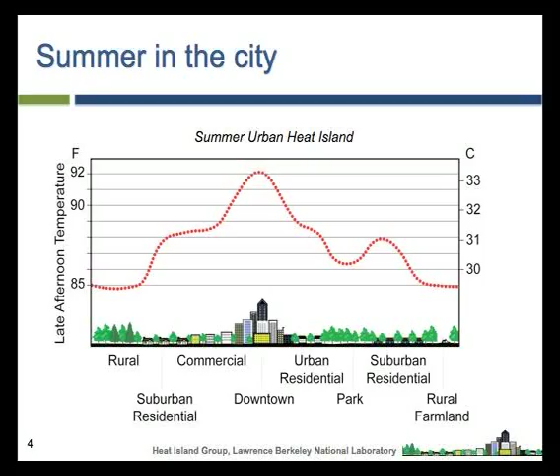So that effect, namely that the temperature here is very different in the suburbs or the rural areas. And as you get toward the center, the temperature, shown here in Fahrenheit, tends to be anywhere from, say, 5 to 7 degrees Fahrenheit higher in the center of the city than it is where the trees are still there.

We simply replace trees, which are cool, the forests are pleasant and cool, with man-made surfaces, which tend to be dark and tend to be hot. In addition, there's a lot more people concentrated in the center of the city. That's another effect, but that we can't do much about. I mean, people want to live in the center and work in the center of cities.

But there is something we can do about the kind of surfaces we put in the city. And that's going to be the gist of this talk. What can we do to relieve this excess heating in the center of cities, or where the cities are built up? This has not only an effect of discomfort, there's a real economic problem here too.

What is shown here is the electric power demand in Sacramento. We got this data from SMUD, the Sacramento Municipal Utility District. On a day in July 1999, this was one of their peak days. We picked it not to be typical, but it's a hot day. It went up to about 107 degrees that day.

And what we show here is their demand starting at, say, 1 a.m. in the morning, 2, 3, 4, 5. The temperature was going down. At about 6 a.m., the sun starts to rise. People wake up. They start turning on electricity, their air conditioners. And as the day goes on, it gets hotter and hotter, and the demand for electricity gets higher and higher until at noon, it's up around 2,500 megawatts.

And then by 6 p.m., it's up here around 2,700, peaks out, and sort of lingers there as the day cools down. And finally, it cools down, and people go to sleep and turn off their air conditioners a little bit.

What this means is that these are indicating the number of power plants you would need to generate this electricity, each power plant being a typical one, named after Art Rosenfeld, the Rosenfeld effect, a 500 megawatt power plant. So to get this much power, you need at least 5 power plants. Close to 6, actually, because 5 will produce you 2,500. So 5.5 power plants.

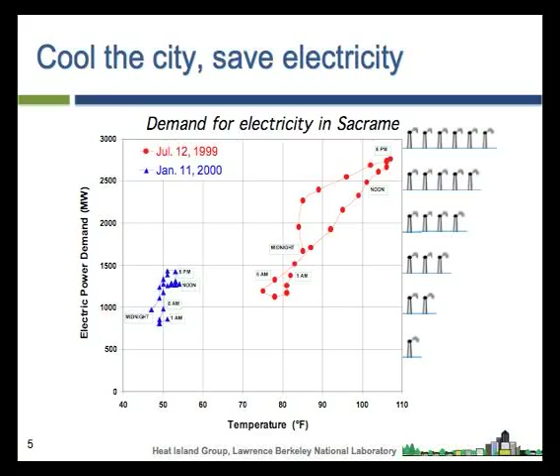But you see, the actual power that's being used on a January day is a lot less, half as much. So that means that the power company has to have in reserve all these power plants, which means that there's a capital expense to have power plants that you built, but you're not using much of the year. So that's a drag.

And then, moreover, these power plants that they finally turn on are usually the least efficient, most polluting power plants, because you use your most efficient ones first. So as you turn on your old plants, you create more pollution, and you're using more energy, and it's an unfortunate situation.

Now, the heat island effect is actually relatively small. Where's my arrow gone? Where has my arrow gone?

All right, but the heat island effect is typically a few degrees. So what can we do? Well, we can possibly slide down this curve a degree or two. That heat island effect was about 5 to 7 degrees. If we can even slide down a few degrees, we can cut off the top of this curve and save much power. The other thing we do is cut down on pollution.

And another effect is the fact that when things get very hot, there are actually deaths caused by this excess heating. The one case that we have some pretty good data on is in Chicago in 1995. There were 739 or so deaths attributed to the heat wave that they had.

And interestingly, almost all of them, like 700 of those deaths, occurred in the top floor of black-roofed buildings that didn't have air conditioning. So those roofs were very, very hot in the sun. If they had thought to whiten the roof, they could have perhaps saved those people's lives. So there's a health issue here also.

And so the question is now, what can we do about it? So the basic physics question that some of us are interested in is, how is the air heated in the first place? And it's interesting that the sunlight coming in from the sun does not heat the air directly.

I could give you a quick proof of that. When you came into this building, you could look out and see the Golden Gate Bridge. The Golden Gate Bridge is 9 miles from here as the crow flies. So that means that sunlight has come from the sun. When you look in daylight, sunlight has come from the sun, it hits the bridge, it comes to your eye through 9 miles of air.

That's twice the thickness of our atmosphere. And yet you can see the bridge very clearly on a clear day. So that's kind of an indication that sunlight travels very well through the atmosphere. And in fact, we'll show real data later about that. So how is the air heated?

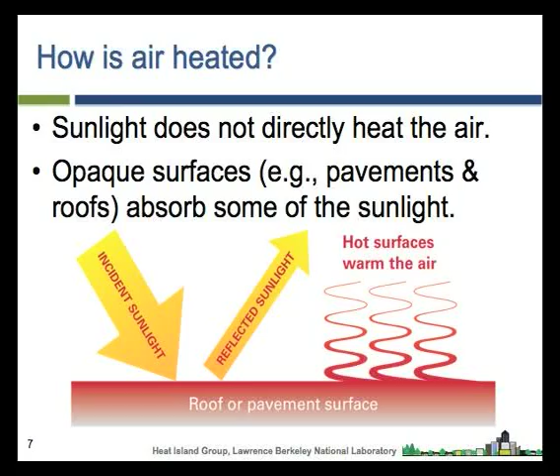Well, the way it's heated is the fact that there are opaque surfaces, surfaces that cast a shadow. So the light comes in from the sun, it strikes the surface. Now this is a light-colored surface. Most of the light is coming back. But some of it stays in the surface, and that which stays in the surface heats the surface. And then the air comes along and touches that warm surface, the hot surface, and the air gets warm from that.

So this is the clue of how we can attack the problem, because the surface is acting as kind of a converter of sunlight into heat of the air. So if we can get a handle on the surface, we can get a handle on how hot the air gets. The other feature is that not only does the roof or pavement get hot, which is actually bad for the roof and the pavement, because it causes them to deteriorate faster.

Moreover, if you have a building underneath the roof, that heat that's been absorbed by the roof travels into the building, and then you have to turn on your air conditioner in some places. Berkeley is an exception. We're lucky. We have the nice, cool atmosphere too. But you go to Sacramento, and it would be impossible to live there if you didn't have air conditioning. So the point is that it's very much advantageous.

Also, pavements suffer if it gets too hot. One of the things that designers of pavements worry about is how hot that pavement is going to get. And if it gets very hot, they have to make a better pavement to handle the heat and the deterioration that the heat causes. So there's an extra expense, which we can avoid if we can possibly make the pavement cooler. So one way of characterizing this is to study what's called the solar reflectance.

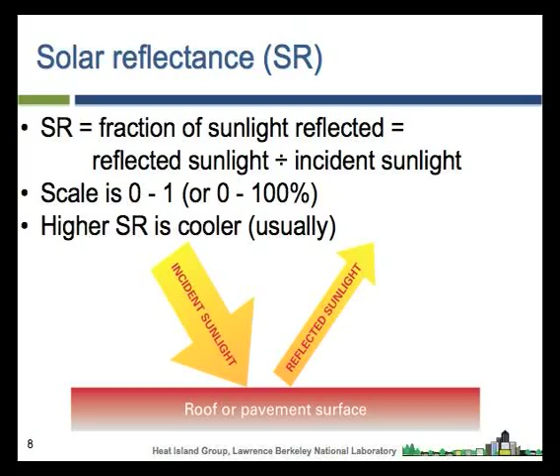What is the ratio of the light that's reflected compared to the light that's come in? On a scale of 0 to 1, 0 would mean zero reflectance, everything is absorbed, it's black. If you have no light coming out, it's black. On the other hand, if all the light came out, it would be very white. This is the light that comes in, comes out. That's 100% solar reflectance. And clearly, if the light is reflected and not caught in the material, it's cooler. So what we're looking for is materials of higher solar reflectance.

And indeed, that theory is borne out. We've done experiments, others have too, of the temperature rise. That is, how much hotter the surface is than the air around it. And if the reflectance is very high, like 100%, like a white surface, it rises a little bit, 5 degrees centigrade, which is about 9 degrees Fahrenheit.

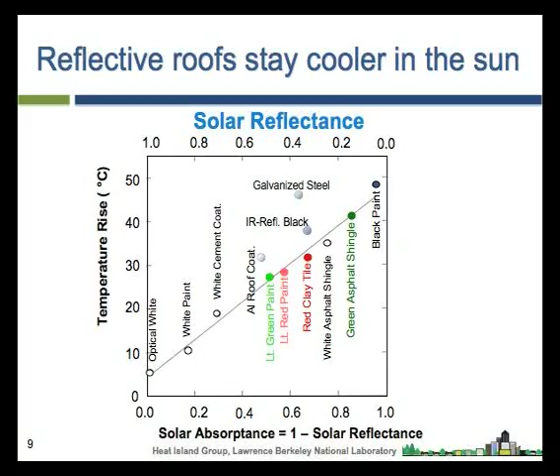Also if you decrease the solar reflectance down to about 0, in other words, it's very black, it's hardly reflecting at all, like black paint, the temperature can rise 50 degrees, which is something like 80 or 90 Fahrenheit above the ambient air. That's your cat on a hot tin roof, really. I mean, you don't want that.

So our goal is to try to urge people to use lighter colored materials or find new light colored materials that will make these lower temperatures. And that's the gist of our talk. There's another feature, and that is that once the surface is warm, like the Earth gets warmed by the sun, it also radiates, but it radiates at a different place.

I'm fond of telling my male students, tell your girlfriend that she glows. It's true, physically she glows in the infrared, I'm afraid. So you won't see her in the dark, but she does radiate. And she radiates at a wavelength around in here, whereas the sun is radiating 20 times higher in frequency, or at wavelengths shorter by a factor of 20. Now here's what I said before, and that is that the sunlight passes through. This is the absorption by the atmosphere.

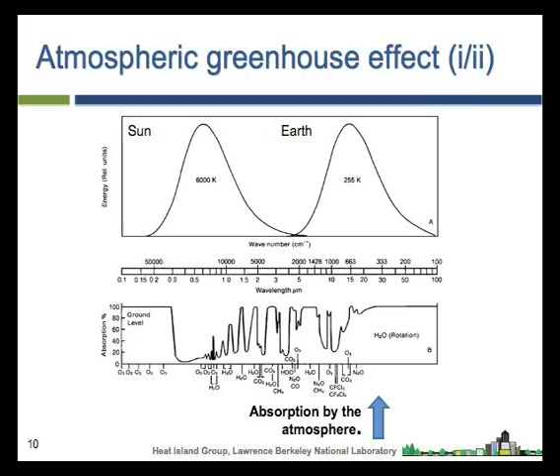Absorption is extremely low, which is one of the reasons our planet is so great. Our atmosphere allows sunlight to pass through, but once it gets converted to thermal radiation, gases in the air like carbon dioxide, oxygen, and water absorb this thermal infrared light, acting like a blanket. This is the atmospheric greenhouse effect, where light coming out of the Earth and us is blocked by gases in the atmosphere.

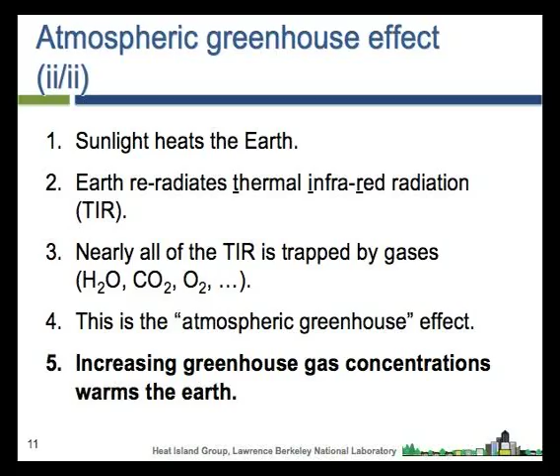If you put in too much of these gases, like carbon dioxide, we increase the absorption and can heat the Earth. That's the global warming problem. The gist is that if we can prevent light from sticking in surfaces, we'll reduce the thermal radiation that's trapped, reduce the greenhouse effect, and keep the planet a bit cooler. Art Rosenfeld will talk in great detail about that.

So here is our task: what can we make cooler? There are many dark surfaces in a typical city. Here is a patch of Sacramento, where we measured what's going on. Some dark surfaces: about 39% of the surface as seen from the sky is pavement, and about 19-20% is roofs, usually dark. Vegetation is good, and Sacramento has a program for more vegetation. But our job is how do we make roofs and pavements cooler, namely more reflective of light. This is the introduction to the rest of the talk.

Dr. Levinson will talk about how cooler roofs directly prevent heat from getting into a building, reducing the air conditioning needed, which reduces demand at the power plant, meaning less energy consumed, less carbon dioxide generated, and fewer of those nasty compounds that turn into ozone, which is bad for your health. Ronnen will talk about that.

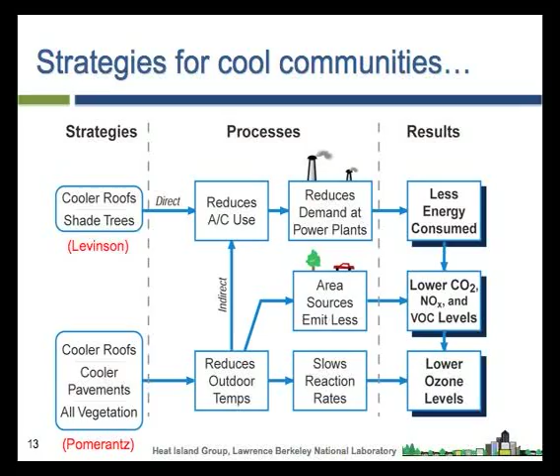I'll mention the other side of it, namely heating the outdoor air. Pavements and roofs also heat the outside air. If we can make them cooler, we reduce outside air temperature ever so slightly, a few degrees, but it can matter, reducing demand inside the house because the outside is cooler. Again, we go through the cycle of reducing electricity demand, energy consumed, and pollutants.

The other thing that happens if outside air is cooler is that area sources like trees emit fewer organic compounds—the part of the tree that you smell can actually become part of pollution, converted into ozone. Also, if you reduce outside air temperature, the reactions producing these bad chemicals slow down, so you can actually get less ozone.

This is the outline of the talk. As I mentioned, Art Rosenfeld will talk about how if you reflect more sunlight, it's as though you took away some of that blanket, because the planet will get cooler—the sunlight will travel right out.

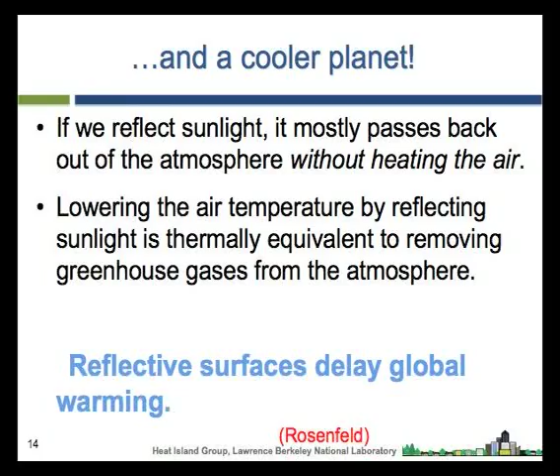You know that because you can go to Google, ask for satellite view, and see your own house—meaning sunlight hit your house and went back up to a satellite, passing through the atmosphere. So if you leave it as sunlight, it gets out very well, and that's what we're trying to do. The other way to cool the air is to take the greenhouse gases out—one offset is equivalent to the other for heating the planet. Art will give us his ideas on that.

So with that, I turn it over to Dr. Levinson. I'm going to take you on a little cool roof safari—in other words, what would you see? What might you see?

Here in North America, we certainly have cool roofs, usually white roofs. You might find them on a commercial building because those roofs usually can't be seen from the street. A white roof on a commercial building is terrific—when new, it could reflect about 80% of the sunlight that strikes it, and it will really help keep that building's use of air conditioning down, or if it's not air conditioned, make it more comfortable on the top floor.

In some other parts of the world, you might see white surfaces on pitched roofs. It's not really a North American aesthetic outside of places like Florida, but this is a picture from Bermuda, where they have a history of white roofs everywhere. Another possibility you might see here in North America is the cool colored roof. Some roofing materials happen to be naturally reflective to sunlight, and others are reflective because you've engineered them that way.

That's mostly because when you have a pitched roof, it's easier to put insulation into your roofing assembly, so less heat tends to flow into the building. If you have a cool colored roof, like this lovely red clay tile roof shown here, your savings are about half as good as a white roof, because the cool colored roof is about half as reflective as the white roof.

Now, we've asked the question: what would happen if you were to implement a broad program of cool roofs on buildings in the US? I'm going to talk about what would happen if you put white roofs on 80% of the commercial buildings we have. Why 80%? Well, some of them are already white, so we're being a little conservative there.

The idea is your typical commercial building might have a gray roof that reflects about 20% of sunlight. You could put on a white roof that, when new and bright, would reflect about 80% of sunlight. But after it gets soiled, it might reflect only 55% or 60%. We assume from day one that it got soiled, because we like our numbers to stand up.

What we found is if you take that 2.1 billion square meters—multiply by 10 to get square feet—of roof, representing 80% of the roofs on commercial buildings in the US, each year you'd save over $700 million on utility bills, and reduce carbon emissions from power plants enough to equal taking over 1 million cars off the road.

Or in terms of nitrogen oxide, which is a precursor to ozone and smog that Mel was talking about, that's the equivalent of taking over 500,000 cars off the road. Plus there are savings from things like sulfur dioxide and mercury, but those I can't equate to cars, so I focus on the first two.

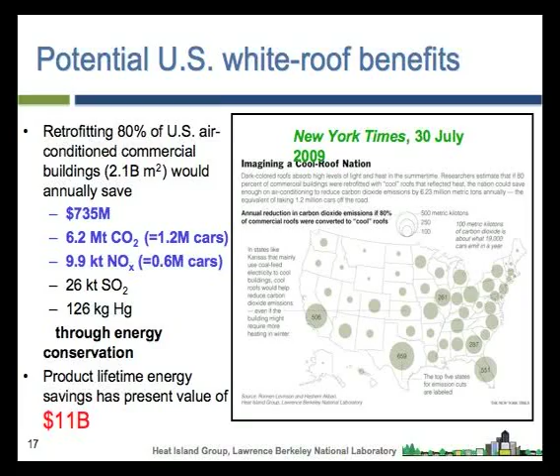Over the lifetime of a roof—typically around 20 years—the energy savings attained would have a present value, meaning what it's worth right now today, since energy savings in the future aren't worth quite as much as savings incurred in the first year. Nationally, that gives you $11 billion worth of savings.

For the US economy, $11 billion maybe isn't a lot, until you realize that for commercial buildings, where your choice might be a gray, black, or white roof, there's no extra cost in choosing white when it's time to replace the roof for ordinary maintenance. A typical roof lasts about 20 years, meaning each year you're replacing about 5% of the US roofing stock. So this is free money, and we all like free money.

But white roofs aren't going to work for every building, because we just don't accept white roofs on those you can see from the street—except in Florida, where they do, and we'll show you some photos later. So I'm going to talk a bit about what we can do for those roofs that will be seen from the street.

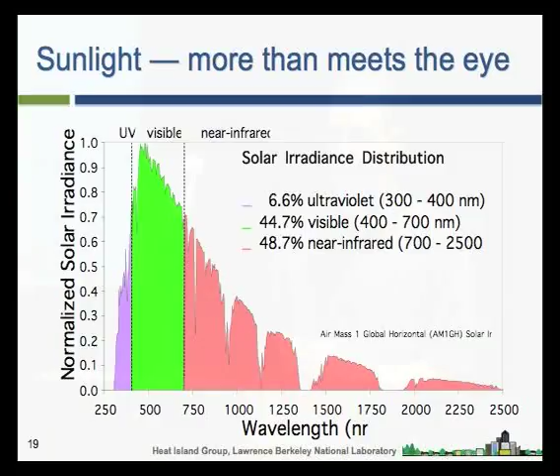So it doesn't matter how much near infrared light a surface reflects, that does not change the appearance. So what you could cleverly do is have the surface reflect in the visible part of the solar spectrum the way that's needed to make it look the way you want. But maybe we could also do a good job of reflecting these invisible patches of light out here in the ultraviolet and the near infrared. Well, it turns out it's very hard to make a surface reflect in the ultraviolet unless it's a bare, shiny metal. Most surfaces don't, so we kind of write that off, and focus instead on this nearly half of sunlight that is at wavelengths longer than what the eye can see, trying to make surfaces reflect as much as possible in that part of the spectrum.

Here's a little graph that tries to put some data to that idea. If I have a white roof here, a brand spanking new white roof on some sort of a box store, and I were to measure its reflectance as a function of wavelength over the solar spectrum, this yellow curve here is that solar spectrum I showed in the last slide. Well, we see that in the visible, it's very reflective, and of course that's what your eye is telling you, and it looks bright white.

Also, though, at these longer wavelengths, it is still pretty reflective. I mean, you don't know that a priori, but you can measure it, and if you were to touch it, you would feel, hey, this is pretty cool. In fact, a bright white surface reflects over 80% of sunlight, like this white roof here.

Now, at the other end, of course, you could have a black surface that reflects almost nothing, but I'm being a little more realistic because there aren't that many black roofs. They tend to be a little more gray. Here's a gray roof, and this is reflecting about 25% of the sunlight in the visible, and then that reflectance falls down to around 15% as you get towards the longest wavelengths in sunlight. And if you were to take an average, you'd find that weighted with the solar spectrum, it's reflecting a little less than 25% of the sunlight.

So this brand new white roof is over 80%, this dark gray roof less than a quarter. Well, in the middle, you can have something like this cool red roof, which I showed in a previous slide. It's not reflecting as strongly in the visible, otherwise it would look white. In fact, it's got this very interesting shape to it, which translates to red in the visible spectrum. But in the near infrared, which doesn't affect color, boy, it's pretty darn reflective. So the result is this cool color, in this case a cool red clay tile, is reflecting about 40% of sunlight. So in a way, it's pretty much in the middle between the case of the dark roof and the bright white roof.

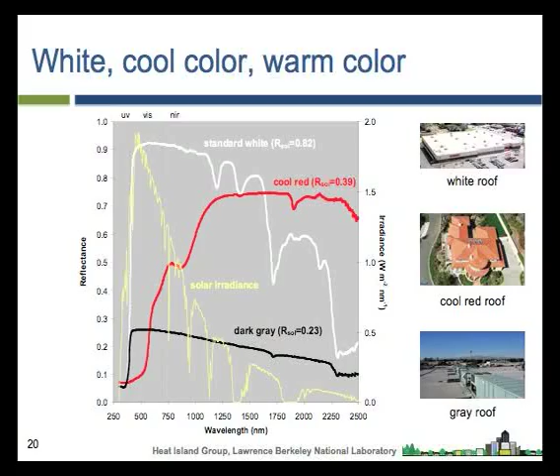And frankly, if your neighbors are going to lynch you for putting a white roof on your building, it's not a bad choice. Better than dying, I always say.

So let me tell you about some of the cool colored roofs that you might see in Home Depot or from your building contractor, or just by looking around, because there are cool roofs on existing buildings right now. You can get cool concrete tiles, and concrete tile in California, because we have this Spanish style of architecture, is pretty popular. You can get cool clay tile. You can get cool metal, which is not as commonly used on homes, but if you were to look at the roof on, say, fast food restaurants, that's a pretty common choice. And you can also get cool-ish fiberglass shingles, or asphalt shingles, really.

I'm going to talk about each, but I thought maybe we should bring up some props and do a little bit of show and tell. So Pablo, our graduate student, is going to come up here and show you a few things.

So while he's bringing things up, I'm going to make an interesting point.

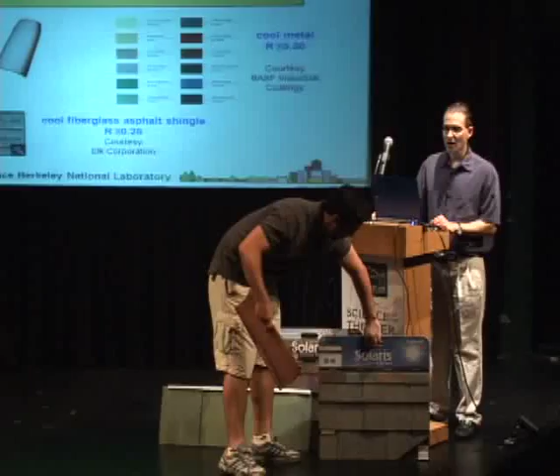In this top image here, I have color-matched versions of standard concrete tiles and what we call cool concrete tiles. They've been designed to look exactly the same. But let's look at this extreme case of a black tile.

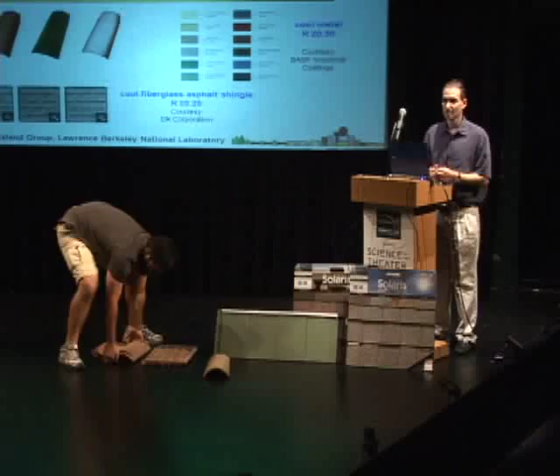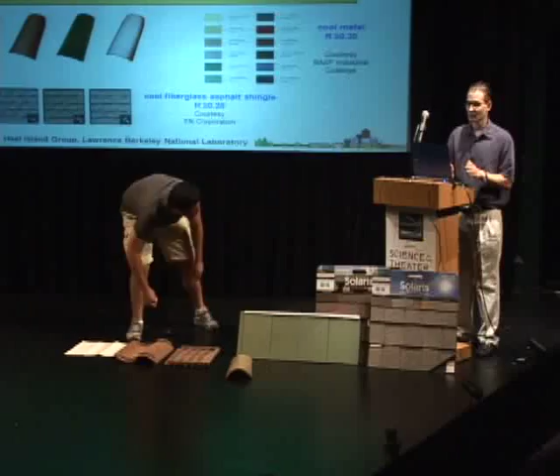A typical black surface made with ordinary black pigments, like carbon black or iron oxide black—if you see anything that's black, it's probably one of those two—reflects maybe 4% of sunlight. Almost nothing reflects 0% unless it's a black body cavity. Ordinary black surfaces bottom out around 4% reflectance.

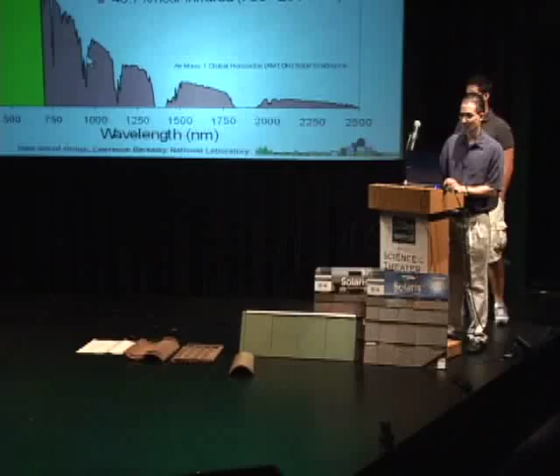If we go instead for a cool color, in which we try to maximize reflectance in the near infrared spectrum, we can do a lot better. In fact, we can make it reflect over 40% of sunlight—a boost of 37 points in reflectance. The darker the color is to begin with, the more improvement you can attain with a cool color.

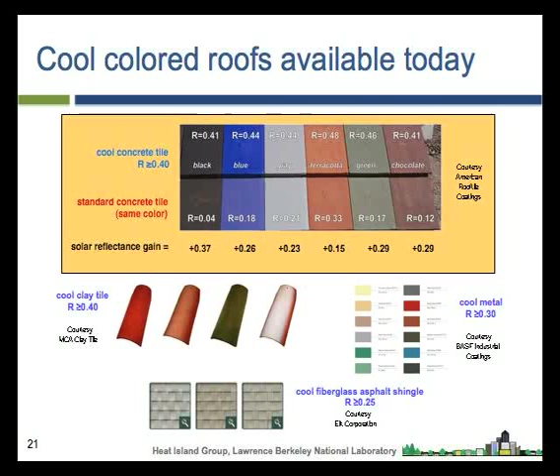And now we're going to have Pablo do a little bit of show and tell. Why don't you talk about what we've got here?

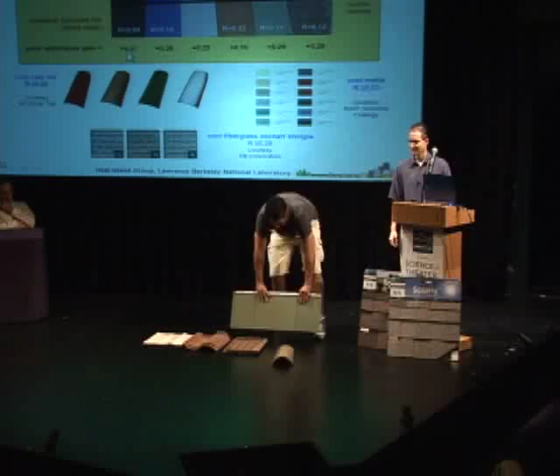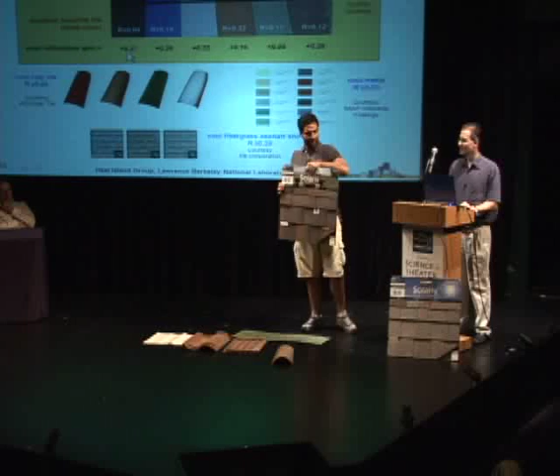These two right here are the asphalt shingles. Go ahead and hold them up. These have a solar reflectance of 26 and a thermal emittance of 91—we'll skip the emittance. That 26 is 26 points, or 26%, a little over a quarter of the sunlight, and it's the same solar reflectance as these other asphalt shingles right here.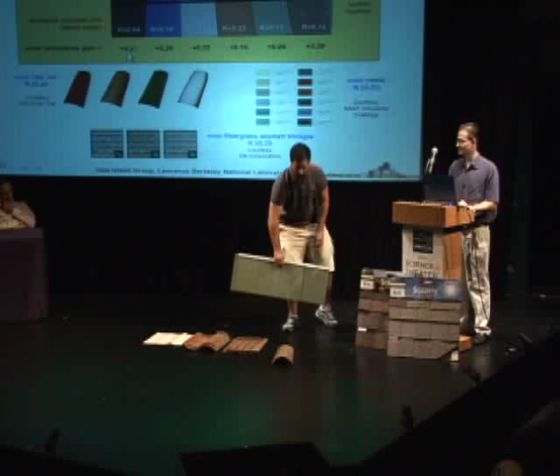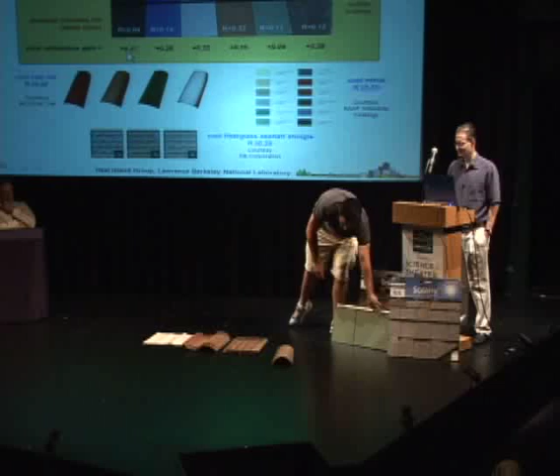Then we go to a metal, this green metal, with a solar reflectance of 41, which is higher than asphalt shingles. Then we go to the clay tile, which has the higher one, a solar reflectance of 52.

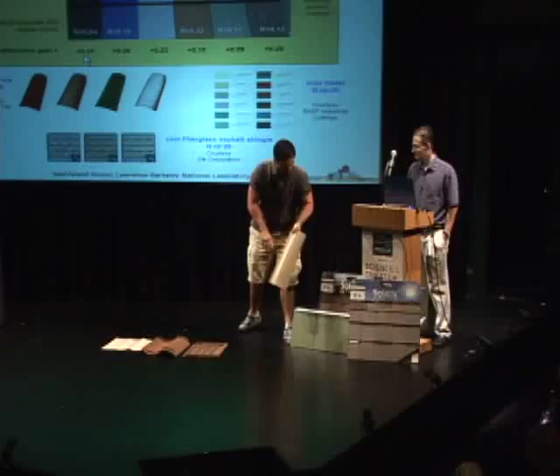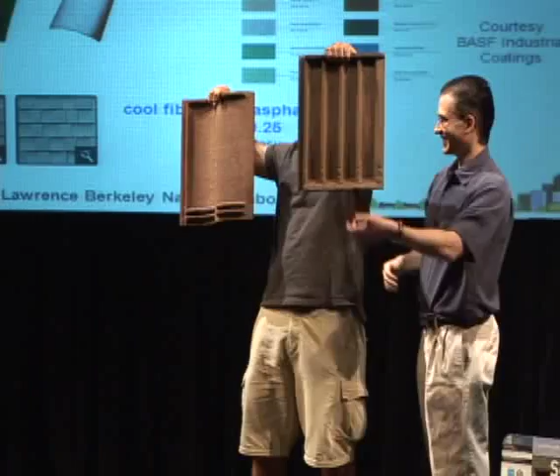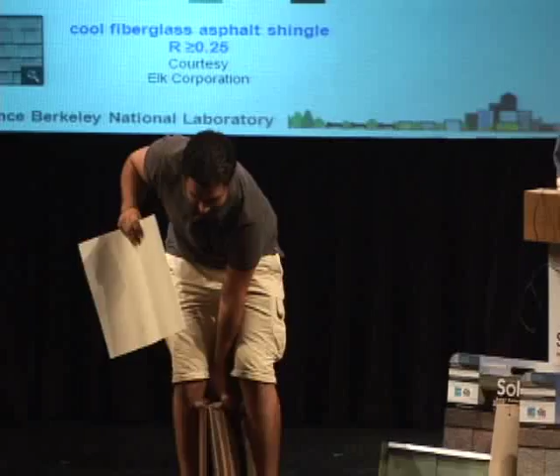These two right here are concrete tiles. They're heavy, and the solar reflectance is 0.17 and 0.20—17% and 20%. And the best one, this white one right here, is a roofing membrane, with a solar reflectance of 88.

That's what we all need to have. Excellent—you see, we work on hiring strong graduate students. So go ahead, you can take them down.

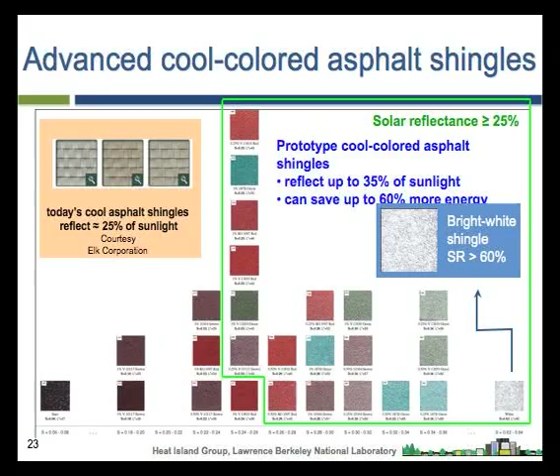A lot of these will reflect at least 25%, or up to 35% of sunlight. And if you're willing to go with a bright white shingle, because maybe that's fine with you, then this one down here in the corner, which I'm showing enlarged here, reflects 62% of sunlight, so well over 60%. That's pretty good. Now, these are still in development in the laboratory, but we've been working with roofing manufacturers, and we hope over the next few years to bring that to market.

The other really important area in which cool roofs can get better is we can try to keep them clean without active maintenance. I've got a picture here of two side-by-side roofs in Florida that have been outside for 9 years. The upper one is a white painted metal, a fluorinated polymer, a lot like Teflon in its dirt resistance characteristics. The lower one is an elastomeric coating over a plastic membrane, and this began as a bright white roof, but after several years, it's gotten grayish.

If you were to go look at exposed white roofs, you'd see this is pretty common. The initial reflectance might have been 80%, but after a couple years, could be 55% in this particular example. What if we could redesign this really common kind of white roof to stay as clean as this less common metal roof? Metal roofing is somewhat more expensive than plastic roofing, so it's just not quite as common.

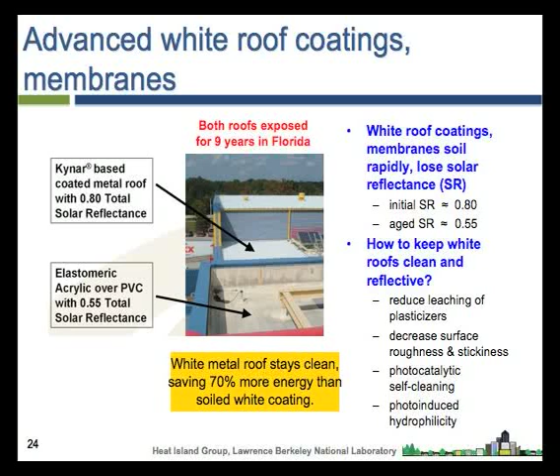Now, the bottom line is that if we were to go to these cool colored shingles, we could improve the energy savings that we get from cool shingles by 60%. And if we could go to cleaner white roofs, we could increase the energy savings from a cool white roof by 70%. And that's nothing to sneeze at. So that was my little tour of cool roofing. And now I'm going to turn this back over to Mel, who's going to talk about cool pavements.

I just will say a few words about some efforts to make pavements cooler, because they are a significant fraction of the city. It's surprising how much. I think I showed before that it might be as much as 35 to 40%. It depends on the city, but that's about right.

Because pavements include, of course, not only your streets, and you have also parking lots and driveways and sidewalks and so on, as we'll see. But the first thing you have to understand about trying to change the reflectivity of pavements is that they are a composite material. What you really have here is what we call aggregate. Namely, it's rocks of various sizes, a gradation of rocks, such that when you piece them all together, they can form the shape that you want, go around curves and so on, and have a nice, correct shape.

So you start out with this array of rocks, and then you have to hold them together. Otherwise, you have a gravel road, which is not particularly satisfactory for our high-speed travel. So we have to glue the rocks together, rocks and sand and stuff, and make a nice, firm, hard surface. So in order to do that, you coat each grain of rock or each piece of rock with a binder of some sort. Now, in the case of so-called asphalt concrete, what it's saying is that the binder is asphalt, which is a petroleum product.

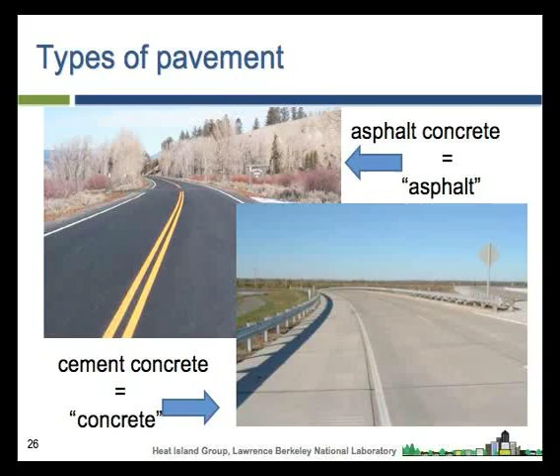It's this black, sticky material, which when it hardens is a very powerful glue and holds the rocks together, and you make an asphalt concrete, asphalt being the binder. We typically call that asphalt, but it really is a concrete, meaning that it's this composite. On the other hand, we have the possibility of gluing the rocks together with cement, a mineral. It's a mineral product, not a petroleum product. And that cement, those kinds of roads we call concrete. I don't know why they pick concrete for the cement concrete and asphalt for the asphalt concrete, but that's the way we speak of it.

So I may kick back and forth between calling it an asphalt road or a concrete road, but they're both composites. But the key thing is that because you're coating each grain, or you're trying to, in order to glue it together, what you see mostly is the color of the binder. So, for example, in the asphalt road, you're seeing the color of the black tar or asphalt. In the cement concrete, you're seeing the color of the cement that you use, which typically is much lighter colored. It's a mineral sort of like limestone or something like that. So it can be much lighter in color. That's the key thing. So again, our target is the binder, if possible, because that's what shows at first.

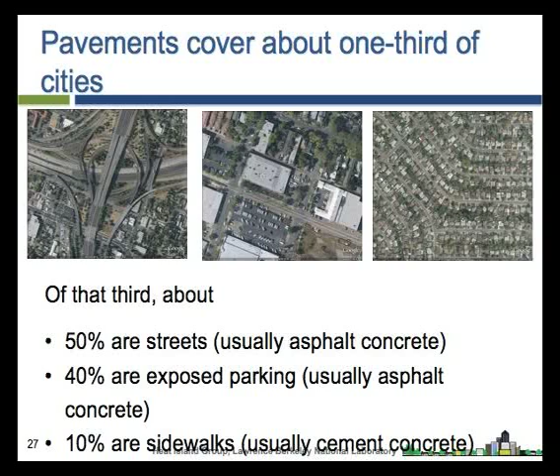Now, of that third of the city that is covered with pavements of various kinds, about 50% are streets that we ride on. There is exposed parking, that is not in garages and stuff like that. This would include your own driveways, parking lots, malls, what have you. Quite a bit of parking area, 40% of that third. And 10% are sidewalks, which are typically cement concrete. But these other roads, typically, as you know, are asphalt roads, asphalt concrete, which are dark. So because these constitute about 90% of our exposed pavement, our real target is to try to make the asphalt concrete lighter colored if we can. And we can also take a crack at the cement concrete, but it's simply a smaller target.

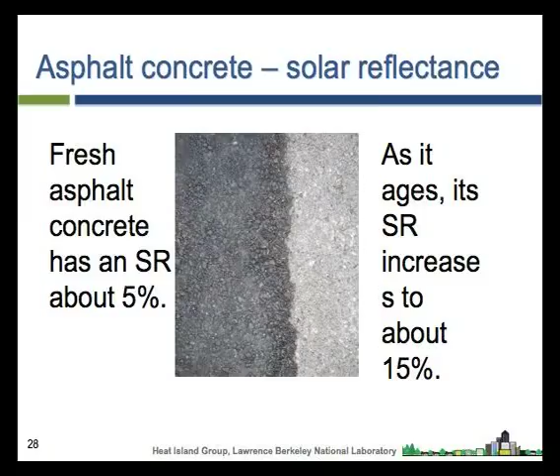So what are we starting with? We start with fresh asphalt concrete, as Ronnen mentioned, a typical black surface. And what's scary is that when people put on a new driveway, they want to make it blacker than black, so they even put carbon in there: see my nice black driveway? So the reflectance is only about 5%. 95% of the sunlight is absorbed in this fresh asphalt concrete. But as it ages, as Ronnen mentioned, ultraviolet light will break down some of the darkness, change its color. Also, dirt falls on it, and various drippings from your car or what have you. And typically its solar reflectance goes up to about 15%. So that's what we start with.

Now, the question is, can we do any better? With a new asphalt pavement, well, you got a problem because you try very hard to coat every grain with the asphalt, so it starts out black. But on the other hand, if you do put in a light-colored aggregate, as the binder wears off, as it will, because it's kind of soft stuff, eventually the light-colored aggregate will show through. And as you know, these roads gray out, as I showed you before. So it's partly due to the exposing of the light-colored rock. Or in some places, like near the seashore, they can use seashells.

Say that 10 times fast.

These white seashells can actually be put in as part of your aggregate. Or porcelain. I mean, you can break up toilet commodes into small pieces and put them into your roads, and they do. So these white aggregates can be useful in making lighter colored new pavements. On the other hand, for an old pavement, which would require maintenance and resurfacing periodically, roughly every 10 years, it's possible to do something.

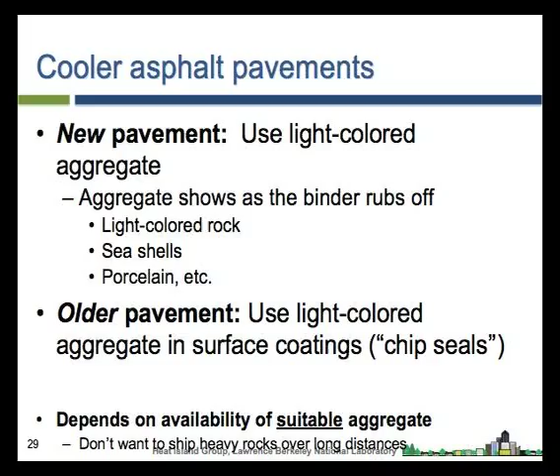Now the big issue with roads is that this aggregate is heavy and you don't want to ship it very far, because then the cost of shipping it from the quarry where they mine the rock to your location can be very expensive. So you really try to use, for practical purposes, rock that is nearby. And it may not be white, it may be blackish.

But the point is, if you have a source of white rock nearby, and it's the same thing, a dark rock and a white rock, use the white rock, and you will gain the benefit of having a cooler road, which actually protects the road, because if the road stays cool, it doesn't rut so much. We have data showing that if you ride over a hot road, it deforms more, as you would expect. And so the road gets ruined faster if it's hot. So there are practical limitations of availability of good aggregate, but if you have it, use it.

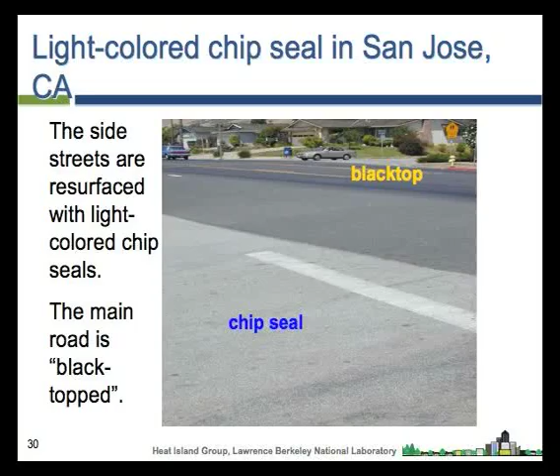This is probably some older gray blacktop road. But you can see there's a striking difference in color. This road would be a lot cooler. You could walk on it maybe with bare feet. On a hot day, I think I would stay off of that one. So this is one possibility. There are others, but for lack of time we'll have to pass over them.

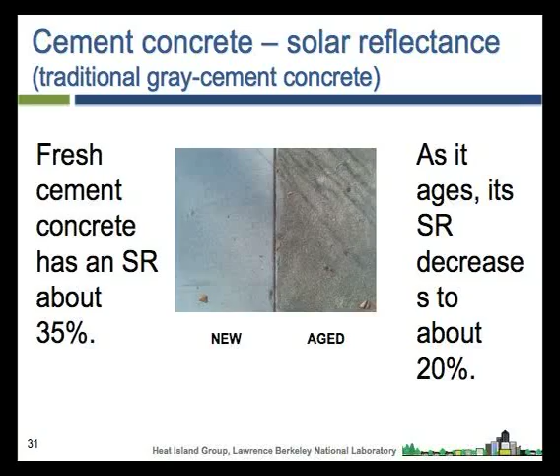The other type of road, as I say, a little less common, is cement concrete. Because the cement itself tends to be rather light colored, it starts out with a solar reflectance typically about 35%, which is pretty reflective. So a new road would look like that. But as time passes, dirt falls on the road, oil, tree droppings and all kinds of stuff. The road tends to get darker, and its solar reflectance goes down to about 20%, say. Depends on the location. But can we do anything even about this?

Well, yes. One of the things you can do is simply use what's called light-colored fine aggregate. It turns out that when you make the cement road, the fine aggregates, the little sandy stuff, tend to float to the top. So you forget about maybe the large aggregate, but if the fines are light-colored, you can go from maybe 35 to 40%.

You can gain something. There's another thing, which is slag, which can be used to replace part of the gray cement. This is a byproduct of steel production, but it turns out it makes quite good cement. And if you put in about 50%, you can get an initial solar reflectance of about 60%. It's quite good reflecting.

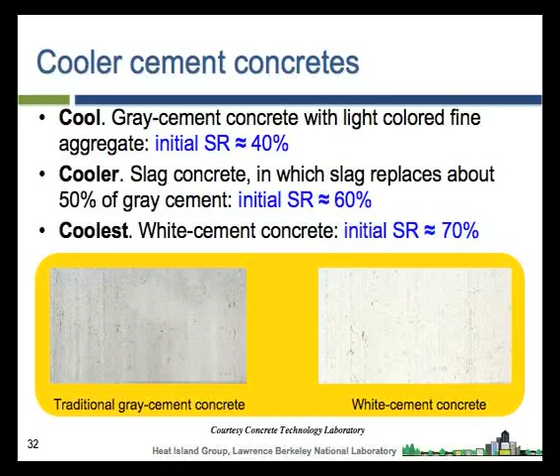And it's also possible to find cements which have very few colored impurities in them. So you can actually make a very white cement. And if you build a road out of that kind of cement, its initial solar reflectance can be as high as 70%. Then, of course, it will degrade in time. So there are possibilities for making even our roads whiter and more reflective, and therefore the city a little bit cooler.

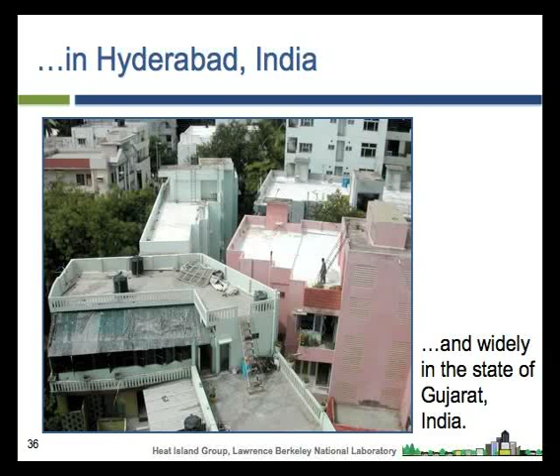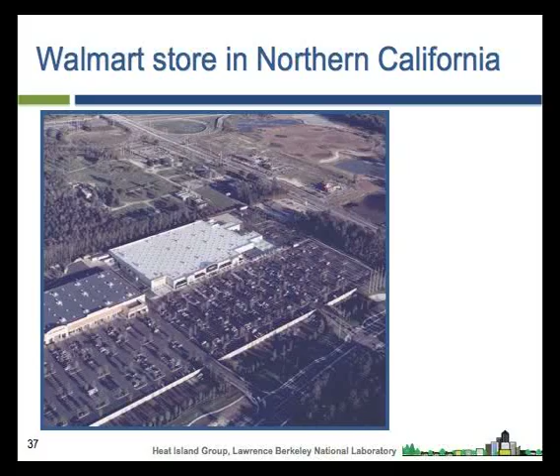That's a Walmart store. In 2005, Walmart looked into the economics of white roofs to save air conditioning and because they last longer than dark roofs, and decided it was time to switch. They've done 4,500 of these box stores so far, including overseas. They've got 1,500 to go. The competitor here, whose name shall remain nameless, has since switched. And in fact, all the box stores are going in for white roofs.

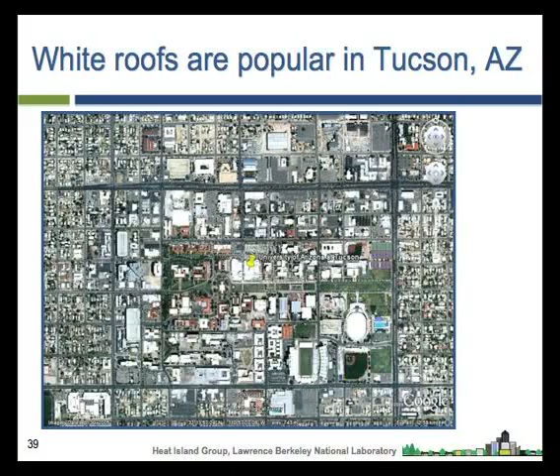So that's what a modern city is looking like from a satellite. That's the University of Arizona in the middle. Nice white roofs or some nice cool colored tiles. But notice now that the residential areas around the side of this quadrangle are mainly white because people know in Phoenix and in Tucson that it's really hot, and Ronnen ran in Florida. Speaking of Florida, that's Punta Gorda, probably a lot of retirees with their nice white sloped roofs. They're not scared of them,

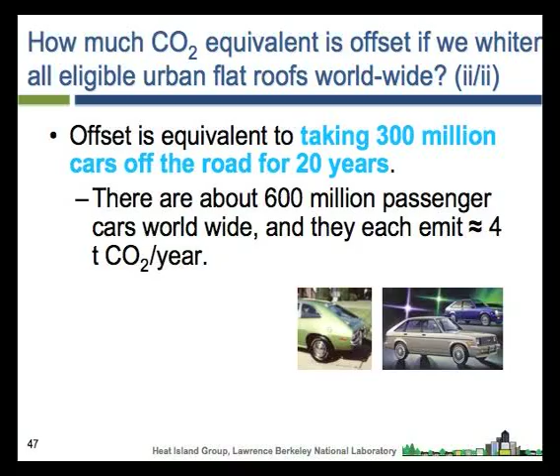Luckily, I'm an old friend of Steve Chu's, the Secretary of Energy, who was familiar with this calculation before he became Secretary of Energy and has been noising it around the world. And one sentence from Steve Chu gets as much publicity as a lecture to you folks from me. So we're embarked in a sort of worldwide campaign to try to convince developing nations who are building like mad to put white roofs into their building standards.

This is, the cars are going to disappear. Ronnen is good at PowerPoint. Thank you, Ronnen.

So what to do now seems to be, first, to try to get other states to follow California. I'll tell you what that means in a moment. I'm going to repeat the present state of building standards in California. Starting in 2005, the commercial code was modified to say a flat roof shall be white, and most roofs are flat, so that's really a good summary of the code.

In 2008, the residential code was addressed. We have 16 climate zones in California, and for the 5 hottest climate zones, it was required that sloped roofs, visible from the street, shall be cool colors. It didn't pay yet to go into the Los Angeles basin, but that's next. And prices will come down. Right now there's a shortage of cool-colored roofing materials because of the standard, but prices will come down as volumes go up, and that will spread across the states.

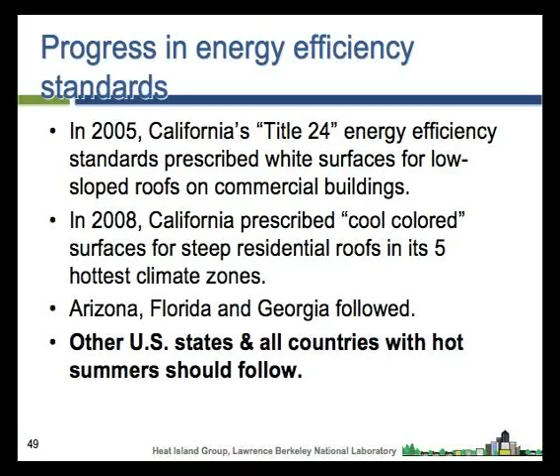So there's Title 24, there's cool-colored roofs. Arizona and Florida and Georgia have followed suit. The problem is most of the United States, the hot part of the United States—well, I lived in Chicago for 10 years, and I would say Chicago summers are pretty hot. You saw that sea of black roofs on row houses earlier. And as far south on the continent as maybe Sao Paulo.

The United States relies on model building codes put out by outfits with the strange names of ASHRAE and IECC, International Energy Conservation Code. States are not required to adopt them. States can make them stronger and adopt them. Some states, like Texas, have no codes whatsoever except for the cities who've taken the lead.

So it's important to beef that up. DOE is busy figuring out how to exert a little more pressure on the states to get modern. ASHRAE and IECC will prescribe white roofs in their next editions. They come out every 3 years.

The situation is really quite encouraging. It's getting a lot of momentum. EPA—Ronnen showed an EPA list of cool roofing materials—that's been available since 2005. DOE is going white, as I said. The Marine Corps is going white, as I said. Dow Chemical started a competition in Philadelphia, and the block that won, out of 2,700 blocks that participated, every house on the block volunteered to accept a white roof courtesy of Dow Chemical.

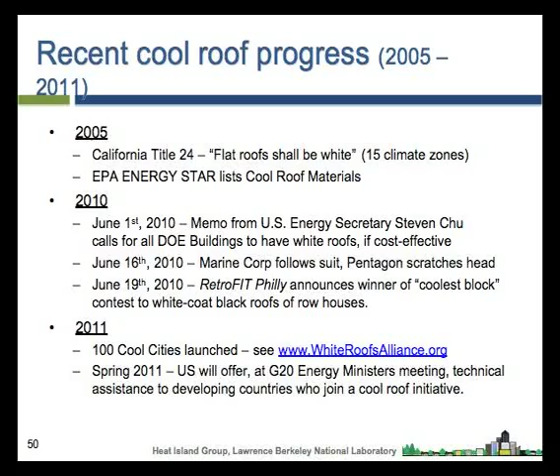Next spring, Secretary Chu is going to a semi-annual meeting of the energy ministers of the G20, which is the group the United States belongs to, which is trying to make voluntary offers to do something about climate change. And he's going to offer technical assistance to any country, or let's say the first 5 countries, which will sign up to address this issue.

And, whoops. Phooey. Forget it. The next slide we won't show. Hit the down arrow, Art. Did it.